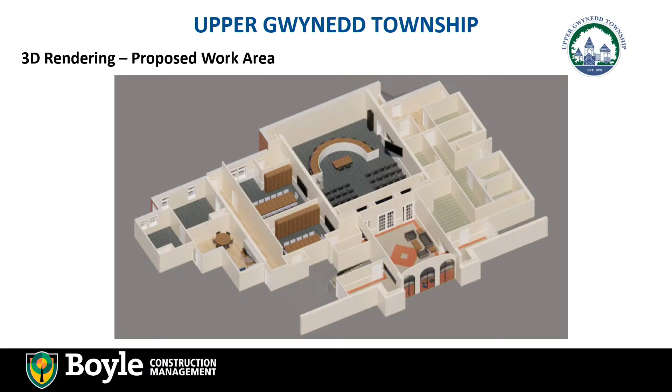You can go on to the next slide, please. Thanks. Here's a view of the lobby. We have, again, some generic furniture. You could certainly add a video monitor in here. It's not shown, but you could add one. You can see the 2 closets were eliminated in here, and by doing that, you could add additional doors, so you have less of a bottleneck at this door here. Next slide. And that's just a view looking the other way.

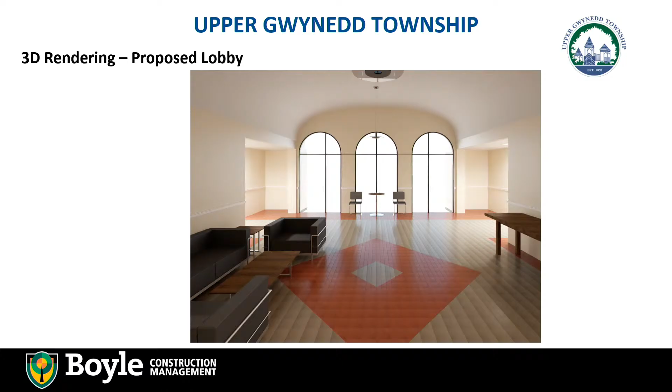And next one. This is a 3D rendering of the boardroom. It's hard to see the curved dais, but it's that low wall behind the podium where I'm standing now. You can see we added some high video monitors. We added a door, it's visible in the back, into the vestibule, the new vestibule space on the police side. And you can see the IT window in that view. Next slide, please. This would be the curve of the not raised dais. It is not raised in any of these. This would be the view you would see roughly from that corner back there.

You can see on the left, the IT window, the new door, the egress is just off this left-hand side of that page. And you can see the condition of the back there. We had to leave a soffit up high because there is some mechanical up there and we didn't want to mess with that. Next slide, please.

And this is a view from any of the commissioners sitting at the dais. This is roughly what you would see. We did a nearly identical view with the 6-inch step and it was virtually unchanged. We toggled back and forth. I kind of wish we brought it, but we didn't.

But to really get a difference in height, you would have to go higher with this floor, which would create additional challenges with accessibility and ramps, and exiting on the other side. You would need a longer ramp down because it has to be accessible. Next slide.

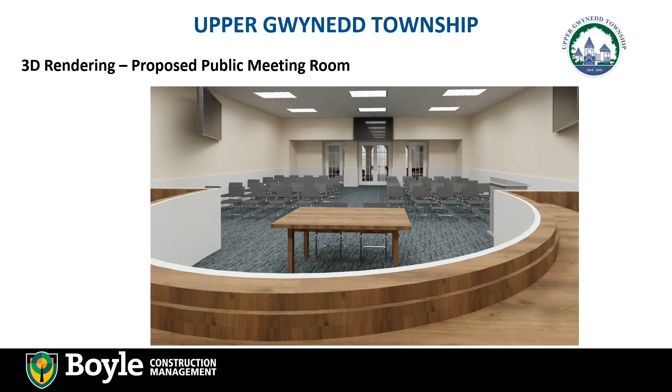For an accessible ramp, it needs to have 1 inch of rise for every 12 inches in distance. So a 6-inch step would require a 6-foot long ramp. If you went to two 6-inch steps, 12 inches high, that ramp would be 12 feet long. So just to give you an idea, as you raise the platform area, those ramps really extend into the other areas within the space.

As part of this renovation, we also looked at the small and large conference rooms, which are on the other side of this wall. We don't have the plan up right now, but right now you can get in from the lobby, and you could kind of inadvertently wander into those two spaces. The layout in the conceptual design eliminates that by moving the corridor, creates a corridor on the other side, and also creates an exterior exit to the rear porch back there. You can go to the next one.

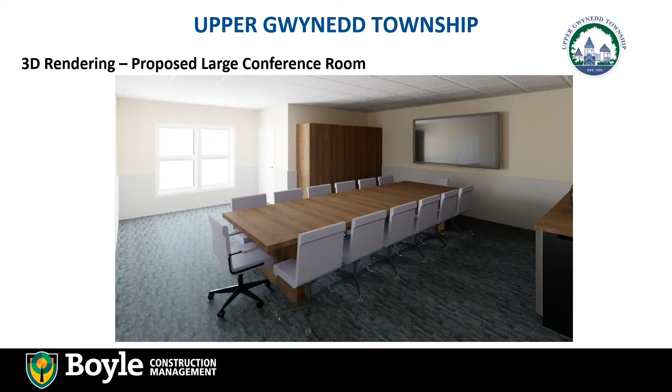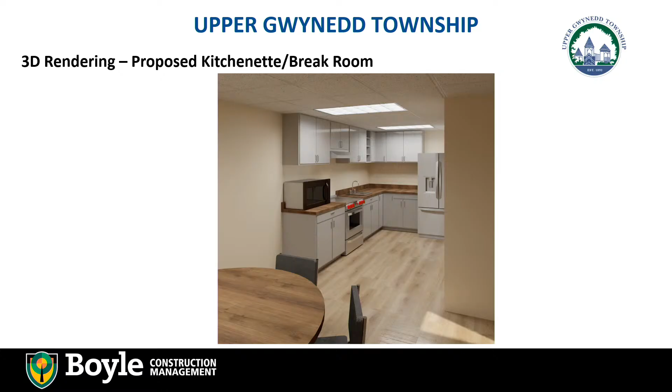One of the concerns that was mentioned was that there's not really a good break room area. So we flip-flopped an admin office adjacent to your township manager, and we moved her to a different location with a window because she doesn't currently have a window. And we turned that space into the break room, which you see there. And that covers the architectural portion of this.

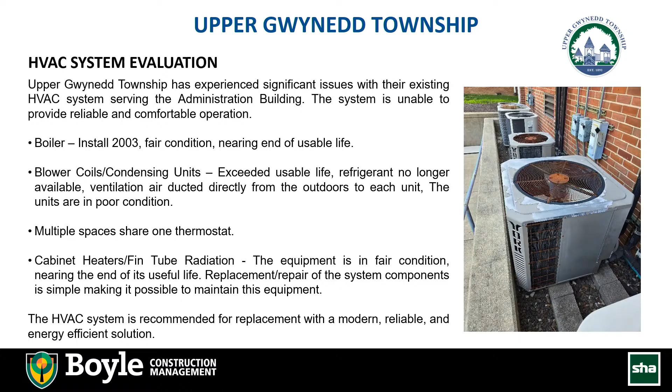In addition to the boiler, the blower coils, there's also cabinet heaters and there's fin tube radiation. So that's all hydronic. That's all fed by our boiler. That equipment is fair. It's also kind of getting to the end of its useful life, but it is simple equipment. It's easy to maintain. There isn't necessarily a need to rip it out unless you really want to, because it's not that difficult to fix. So kind of looking forward, we're recommending that the system be replaced with something modern, reliable, and energy efficient.

So we could hop to the next slide if we're ready. So we put together two potential options. Option one is sort of the economical, simple, let's just address the big problems right now kind of thing. So what this is, it's a VRF and the boiler. So VRF, if you're not familiar with that technology, variable refrigerant flow, this is something that didn't exist 20, 25 years ago when this facility was built.

It's basically heat pump technology where you have the indoor units and they are all tied together through refrigerant piping to a common outdoor unit. And it enables a system to sort of share heating and cooling. It's very efficient. It's up to date with modern technology and expectations.

But the idea behind this option is every one of those existing fan coils gets replaced in place with a VRF unit. So the duct distribution, all the other stuff above the ceiling stays. And that makes this a fairly simple and straightforward replacement. It makes it economical, makes it quick, makes it simple and easy.

Of course, that also comes with some disadvantages in that you have to keep your current thermostat setup. So you would still have spaces sharing a thermostat. If that's a struggle and something that we're looking to address, this is not going to fix that. It's certainly going to work better just because it's newer, but you'll still have to deal with that part.

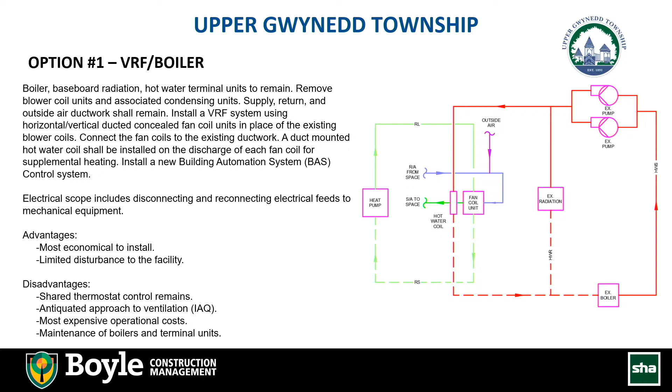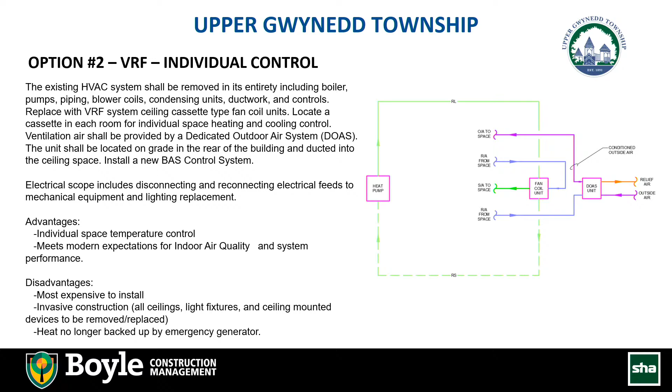Another disadvantage is that currently your boiler is backed up by the emergency generator. Based upon the documentation that I have, you cannot actually heat the building with the boiler running on the generator, but it kind of gives you something. This system is all electric. So if you wanted to back up all of your heat, you would need a much larger generator. So slight disadvantage there that I thought was worth a discussion. So we could move to the next slide.

So we did a 20-year life cycle analysis to think about what this looks like over time. So option number 1 compared to option number 2, construction costs, you can see there's a significant difference there. And that's again because option number 1 is sort of like the Band-Aid, let's fix the issues right now thing. Option number 2 is more of a long-term, better performing option. So there's a significant cost there.

Option number 2 does gain quite a bit of ground in maintenance cost. There's a really big jump there on option number 1, and that's because you're going to end up replacing that boiler before 20 years. So I wanted to capture that. And also option number 2 picks up a little bit of speed in terms of energy use because there's some savings there. Net, when you get to the end of 20 years, option number 2 is still more expensive, but it's a better system.

So that kind of comes with that system because you're getting that individual space temperature control. You're getting better humidity control. You're getting better filtered air. It's doing more for you. You're getting new LED lighting as well with option number 2. So, just my experience being a mechanical engineer and designing these systems for other facilities is that, although it's more money, you're going to be happier with option number 2. That's why I had recommended that one.

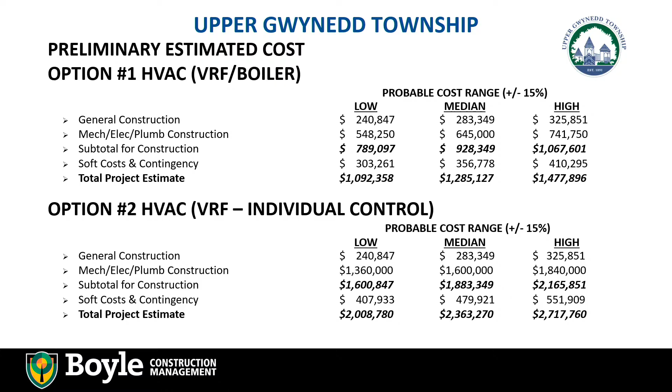And then we always recommend carrying a contingency. Really important with renovation projects, because when you start opening up walls, you don't know what you're going to find until you find it. So we always recommend carrying a contingency in there just for the what ifs when they come up. Option 2, with the complete HVAC renovation, was roughly $2.4 million, with a 15% swing in either direction, for a low estimate and a high estimate.

And then should the township decide to move forward with a project, we're estimating about 6 months of pre-construction services and then about a 3-month construction phase. And as Nick mentioned, option 2 is more invasive work, but we would work with the township on making sure that was phased. We wouldn't expect everybody in the building to move out. We would work on the administration side at first, and then maybe the police department side second, and we would try to phase that.

So try to minimize the disruption as much as possible through the construction part of it. But both of them are going to be interruptions, but option 2 is going to be much more invasive. Any other questions? Yes. Like about 3 slides back. That one.

My question is, if you choose option 2 and at the end the total is $2,800,000, why is it more if you have all new stuff? Like, you should have less maintenance costs. You have all new stuff. So the maintenance cost in that chart does go down drastically for option 2, but the overall cost is about $300,000 more between those two numbers. And that's really to address all the things that option 1 is not addressing.

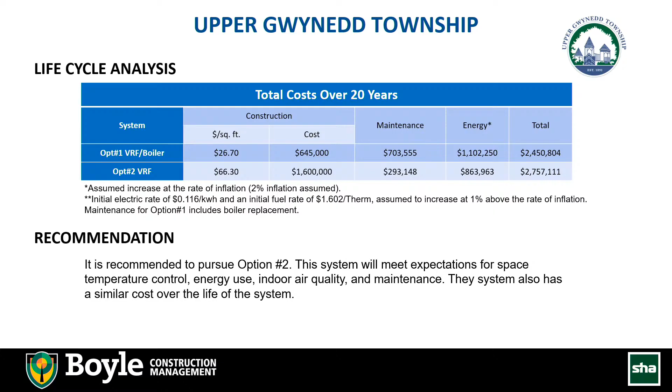But again, I think the performance advantage of option 2, that's where that value comes into play. What? That's where that value of that additional $300,000 really comes in. From the performance advantage, yes. What does that mean? So it's its ability to keep you comfortable and its ability to operate economically. Any other board questions?

The young lady, no one else has any more questions. When I looked at it, I'm confused about the township manager, admin, and the kitchen and break room. Could you go back to the floor plan, please? The zoomed in one with the pink, yellow, and blue. Keep going. Yep, that one. You're looking at the township on the far left of the plan, the two blue, the township manager's office, the admin office, and the kitchenette break room. Right. Yes.

Originally, the kitchen and the admin office on the far left were flip-flopped. That L-shaped space that currently is shown in pink, that was somebody's office, I think Sandra's administrator. And it's an awkward office. The L shape does not lend itself to furniture, and she has no window. At the same time, it was brought up in a couple of the meetings that the current kitchen situation doesn't leave enough room for sitting to eat lunch.

So we thought, why not flip-flop those two spaces? By doing so, you can fit a small kitchenette where that office was, relocate the office to where the current kitchen is off the back, and then provide a direct access from your township manager's office to her administrator's office. And so that's why we ended up flip-flopping those. So how are you extending Deanna's, the current administrative assistant office?

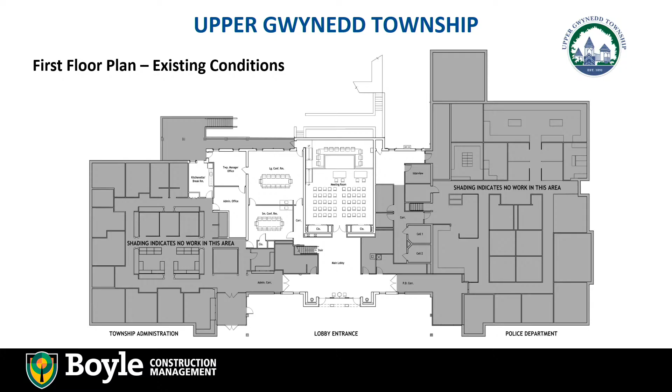Yes. Mm-hmm. Right. Okay. Could you go a couple of slides forward, please? Sorry, I have you going back and forth. Yep, that one. Thank you. You can see it there, yeah, you got it.

Sure. Here. I just had a general question about the meeting space. I mean, the meeting space currently is used for many smaller committee meetings that the public is part of. Would they not be able to access those conference rooms except through controlled access somehow? Or is there a way for the public committee members to get to those meeting rooms?

You want to take that one? Yes, so those two meeting rooms would not be meant for public access meetings. They would be for staff meetings or executive sessions or things like that. All public meetings would be held in this room. Certainly, if admin had a meeting with someone from the public, you could escort them back around to them, but there would be no direct access for them to just walk into those rooms.

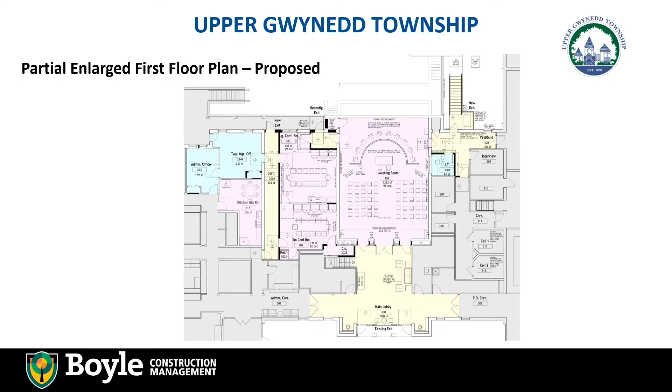And also from the vestibule here, you could get into the large conference room. We were calling it the large conference room. I guess you could call it the executive session room, I'm not sure exactly what you call it, but you can see the vestibule there. From this vestibule here, yeah, there you go. You could get into that large conference room from the meeting room here, but that vestibule is controlled.

On the side meeting room access, we can control that with fobs and the fob system that we already have, or just good old-fashioned keys, as long as staff is only permitted past that other side of the rooms. Yeah, so maybe we would just have to give more fobs to people who have meetings. Any other board comments?

Thank you very much for your presentation. Thank you very much for having us. We appreciate it. And we will work with administration to address some of the comments and develop some sketches and some renderings to kind of show you what those other things would look like. Thank you. We appreciate that.